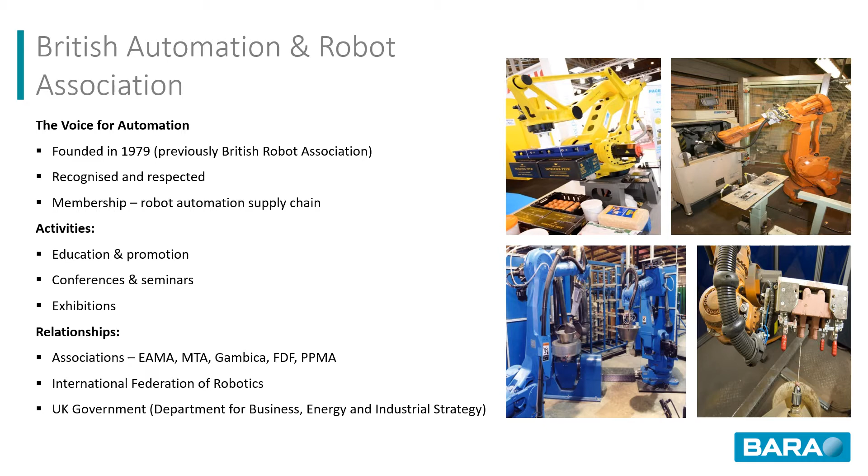We have relationships with EAMA, the MTA, Gambica, the FDF, which is the Food and Drink Federation, and also PPMA, which is the Process and Packaging Machinery Association. We're members of the International Federation of Robotics and contribute annually to the sales statistics for robots. We also have interaction with the UK government, for example, the Department for Business, Energy and Industrial Strategy. So we do have a means of influencing government strategy on automation.

There are many challenges facing UK manufacturing, particularly in the area of productivity. The Office for National Statistics did some research, and they've made a statement: 0.3%. That is the estimated average annual increase in UK productivity in the decade or so since the financial crisis. Clearly, to be competitive, we need to increase productivity. I think this statistic is rather shocking and gives a clear indication of the challenges which UK industry is facing.

We've touched on the fact that there are certain challenges facing manufacturing in the UK. Let's have a look at some of them in detail. Productivity. Well, I think we've touched on that, and I don't think I've got anything more to add other than we need to do something to overcome the relatively low rates we are seeing. Brexit. We're probably all sick to death of hearing about Brexit. I won't touch on that. We know there are challenges. Hopefully we're starting to overcome them, but no more to be said.

COVID-19, oh crikey, what a disaster that's been. Many manufacturing industries ceased production completely, others were just ticking over, yet in certain areas there's actually been a boom. So there are a number of companies who have ended up employing more people, increasing production, extending manufacturing facilities. So not an absolute total disaster, not good by any stretch of the imagination, but nothing else to add there, I don't think.

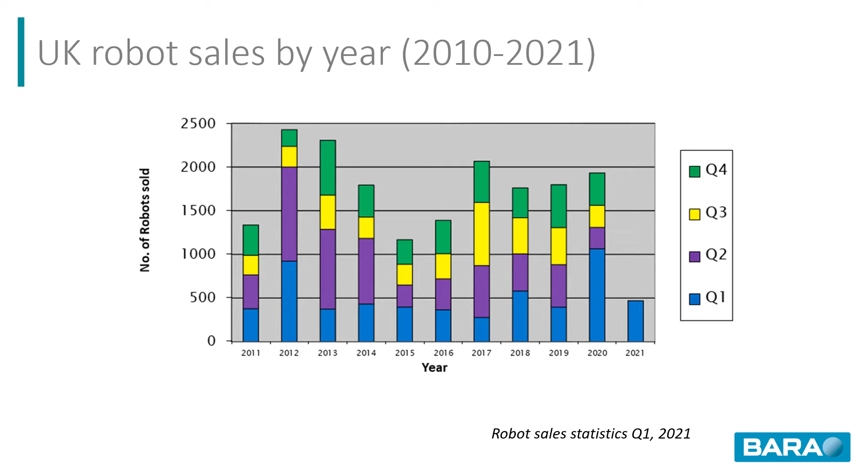So while we could beat some of them in the field of football, clearly not all of them, in the field of robotics and automation, we are getting thrashed.

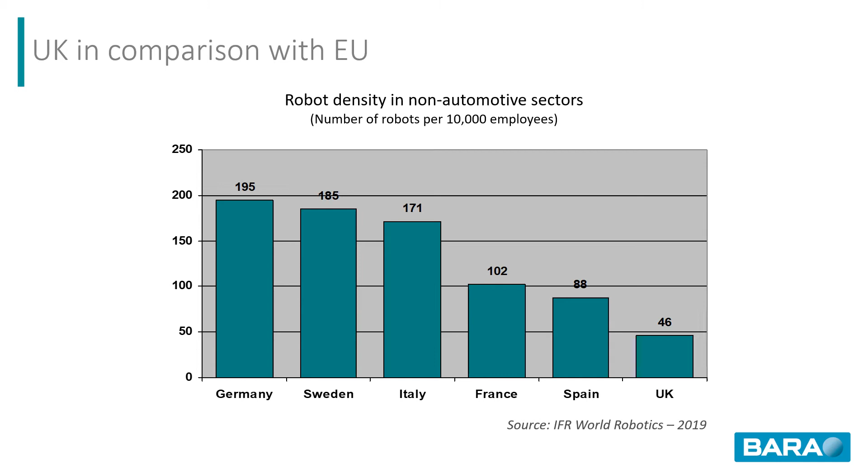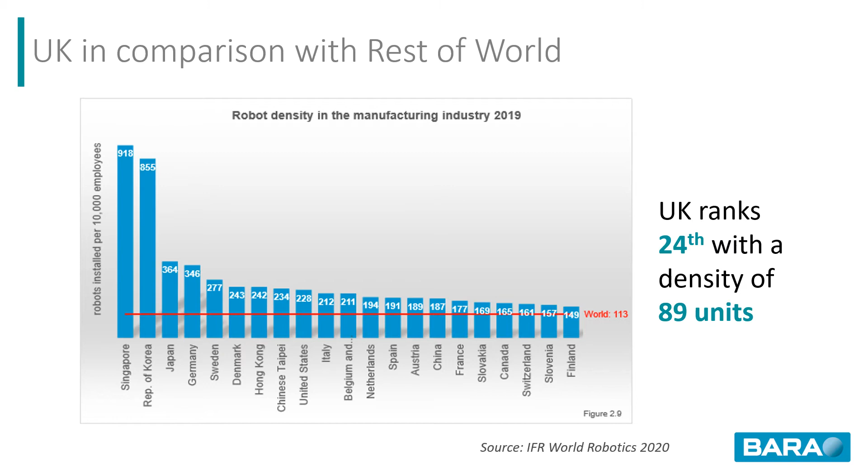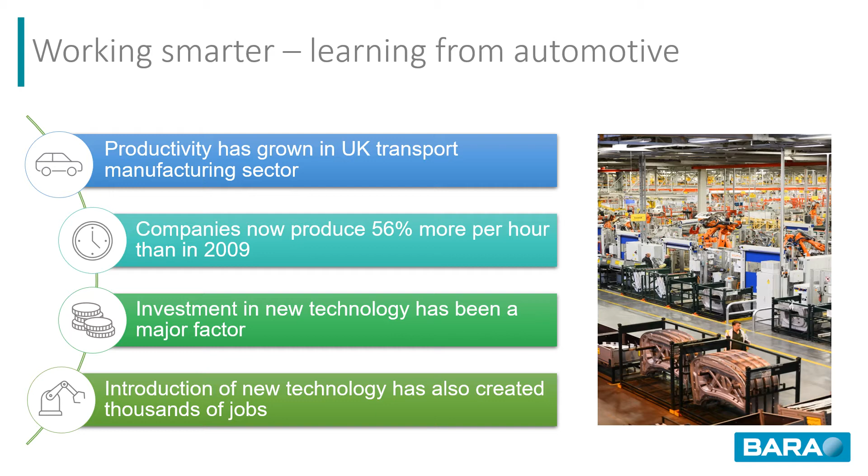There was a study done recently by the Copenhagen Business School looking at automation, productivity and employment across quite a wide range of manufacturing sectors, and they compared quite a large number of EU countries and also Japan. Sadly, one of the main findings is that the UK was in last place for productivity in almost every sector they looked at, which is obviously quite depressing.

However, another factor which came out of the work they did was that if the UK was to adopt more robotics and automation, and if it became as automated as the most productive country, then we would see over a 22% increase in productivity. The effect of that on employment: in the short term, a potential decrease, but longer term, an increase of nearly 7.5%.

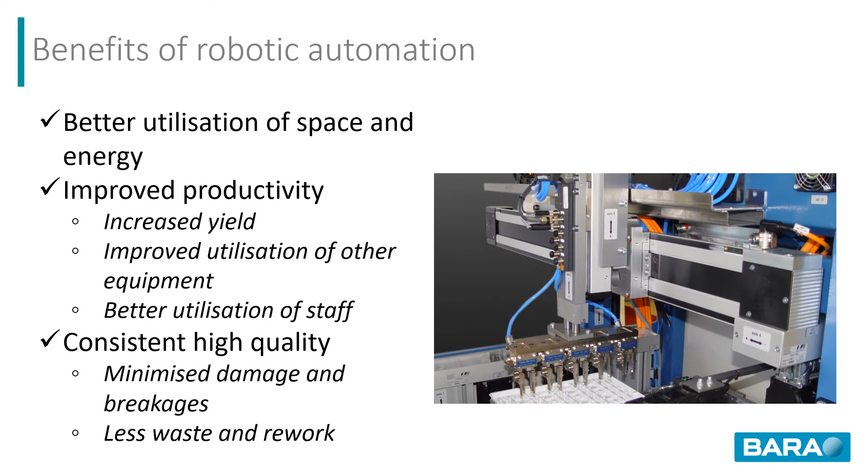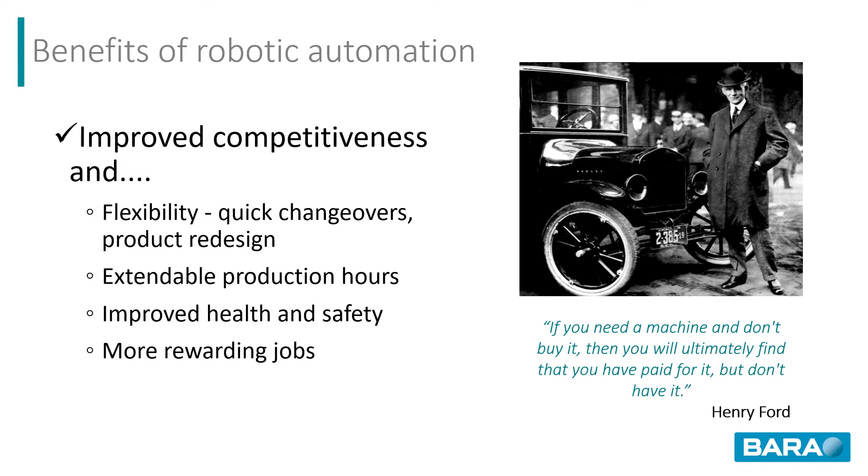There are many opportunities for putting in automation in the UK. Applications such as machine tending, welding. There are very many very nice robot welding cells. Picking, high-speed picking, packing, palletizing, any type of task which is boring, repetitive, mundane, dangerous is a perfect opportunity for automation.

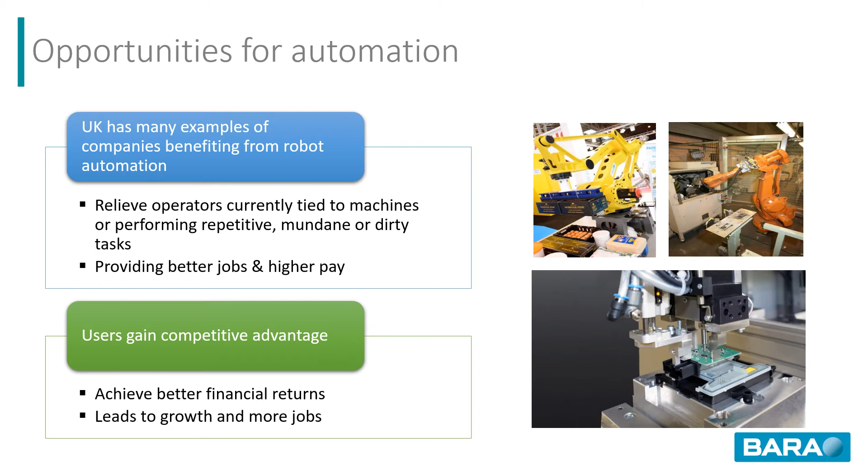Companies who put in automation do gain a really good competitive advantage. They could achieve better financial returns, which in turn means that they are more efficient, more productive, more profitable, which in turn leads to taking on more business, so they grow. As they grow, they give more employment opportunities, bring in more jobs.

Once we've decided which of the automation opportunities we want to follow, we then need to consider which is the preferable type of robot to be used for the application. And at the moment, typically you could choose between either a collaborative robot or an industrial robot. Collaborative robots, commonly known as cobots, are relatively new into the market, but there is some strong interest being shown from certain manufacturing sectors.

One aspect is that they can reduce the fear factor of installing robots. It is a type of robot which can be used collaboratively, working side by side with humans. It gives us great flexibility. They're relatively easy to install and use. They can be used for operations which require direct collaboration between humans and robots.

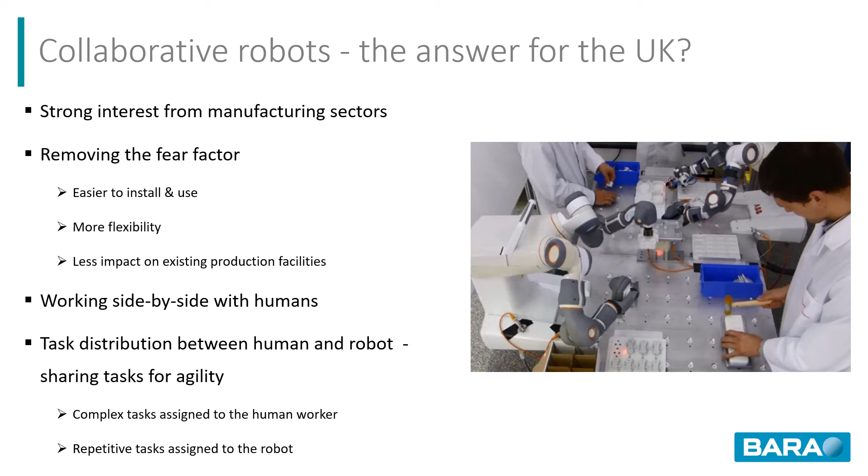For example, an operator could assemble certain parts of an assembly which require manual dexterity, which robots just can't have. They can then pass them to the robots, who can then take over and conduct other tasks on them, which are repetitive, boring, mundane. So typically cobots are used in areas where batch sizes are relatively low. Perhaps there are space constraints.

There could well be situations where on a production line there just isn't enough room to put a physical barrier around a standard industrial robot. Where they form part of a process which requires human intervention, where payloads are low, most cobots have capacities of 10 kilos and less. There are a few available which have around about a 15 kilo payload, and I think there is one which has up to a 35 kilo payload, but the majority are 10 kilos and less.

They are not as repeatable as industrial robots, so if an operation has got a repeatability requirement of more than about 0.1 of a millimeter, then cobots can be absolutely fine.

Applications which are slower, they are not by any stretch of the imagination high-speed robots, because of the way they operate alongside human operators. Then there is an absolute requirement to keep the impact force on the human body as low as acceptable. So therefore, speeds less than 1 meter per second is all that can be used with a cobot.

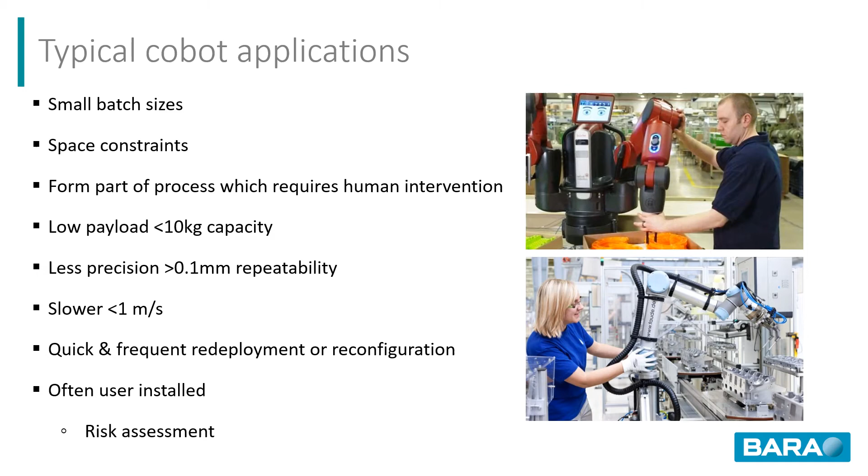When we start looking at typical industrial robot applications, you'll see that immediately the higher volume type of production scenario is very much where they are ideally used, where tasks are dangerous, arduous, dirty, repetitive. Again, these are ideal scenarios for industrial robots. Usually when robots are used in an industrial capacity, they're usually around a fixed installation, usually fully guarded with safety interlock doors, safety access switches, light curtains quite often used, with limited human intervention.

It is possible to allow robot setters, robot programmers into the robot cells, but to gain access it's usually through a trapped interlocked key system or a coded fob. The robot is then put into a manual mode. It will not be possible to run it in an automatic mode. In the manual mode it will run at typically around about 10% of the rated maximum speed. The operator will be using a connected teach pendant with an inbuilt deadman, so they can work safely in close proximity to the robot.

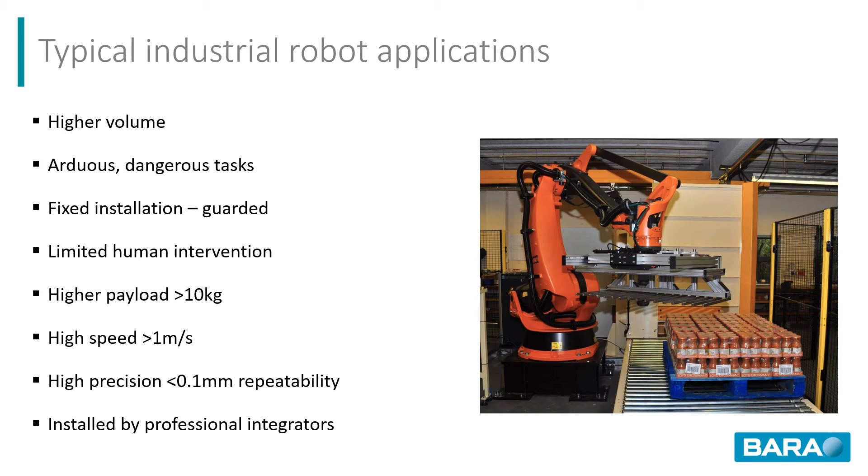Precision. Most industrial robots are capable of performing with a repeatability of less than 0.1 millimeters. On the smaller ones, typically you can get down to 0.025, 0.035 millimeters in terms of repeatability. Robots of this type are nearly always installed by professional robot integrators.

If the thought of integrating robots is quite daunting, there is support available from BARA. If you get onto the BARA website, then it's possible to download how-to guides. There are white papers on various aspects of robot operation. Also expertise and advice. There is a listing of independent consultants who are available for advice. There is also a new scheme which has recently been introduced by the BARA in collaboration with the RIA, the Robotic Industries Association, which is an American-based organization. So we've collaborated with them to introduce the certified scheme for robot integrators.

So now we've gone through some of the background to robotic systems integration. How do we actually start the process? Firstly, I would suggest that you clearly define the objectives. What do you want to achieve? Is it to increase throughput, improve quality, reduce labour and costs? Or is it, as has happened to me, that you just want a robot to show your customers that you're a go-ahead company because you're automating?

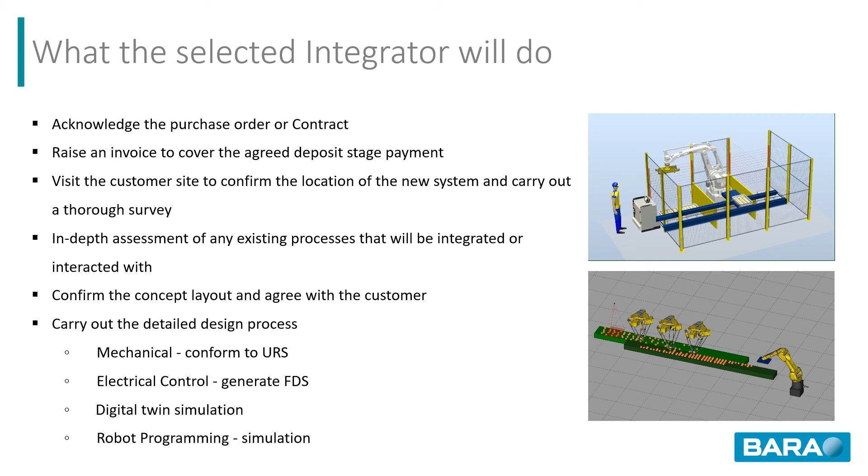What you will find is that every robot manufacturer does have simulation software which is available for their integrators. Moving on, we'll then get to a stage of signing off the design and bringing about a design freeze. This may well trigger another stage payment with the end user. Once the design has been finalised, we're then in a position to place orders for third-party equipment, for example the robots. However, on some relatively short lead time projects, it may be necessary to actually place orders for some third-party equipment before the design freeze.

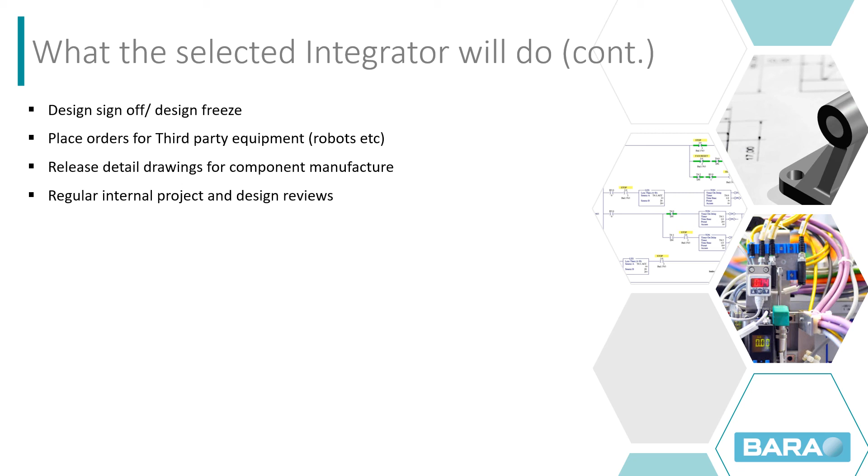Next stage, we should be able to release detailed drawings for manufacture of components and other sub-assemblies. One absolutely crucial thing which must take place is regular internal design reviews. Project managers should be keeping tabs on things, making sure that everything is running smoothly, the design is progressing to the point where it does fully conform with the URS, and yeah, making sure everything else is absolutely on track.

Equally, if possibly not more important, is to continue having regular project reviews with the customer or the end user. Ideally, they should have appointed a dedicated project manager so that there's an absolute continuity of communication. As time passes by, components will be manufactured, fabrications made, systems painted perhaps, and it will get to the point where it's possible then to start assembling the system mechanically. Again, there may be a payment due triggered by starting to assemble.

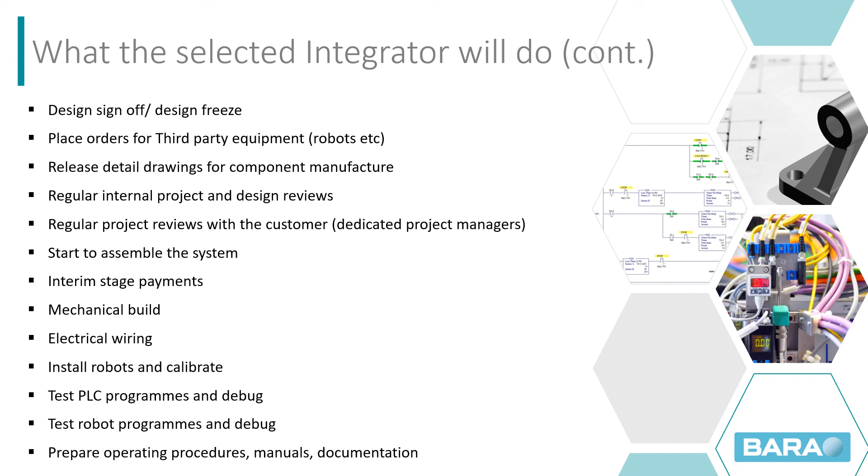Mechanical build continues. Then you get to the stage where electrical wiring can be put in place. Install the robots. Once we've got power on, you can then start to calibrate the robots. Start testing PLC programs and debugging them. Then get to the stage where robot programs can be tested and debugged stage by stage. Don't forget, in parallel and in the background, there will be operating procedures to prepare, manuals to produce, documentation to keep on top of.

Then you'll get to the stage where an internal pre-delivery inspection can be conducted. Here, you've got to make sure that the system is conforming to the performance requirements of the URS, that the FDS for the control system is being adhered to. Crucial is doing a full risk assessment and safety check to ensure that the system does fully comply with ISO 10218 Part 2.

Once everything is satisfied, it'll be the time to invite the customer along to conduct their pre-delivery inspection. Again, what they will be doing is a full performance check against the URS, and if everything is satisfactory, they'll sign off the system when it meets the specification. I would fully urge you, do not ship any system out of your works until it's been 100% satisfied.